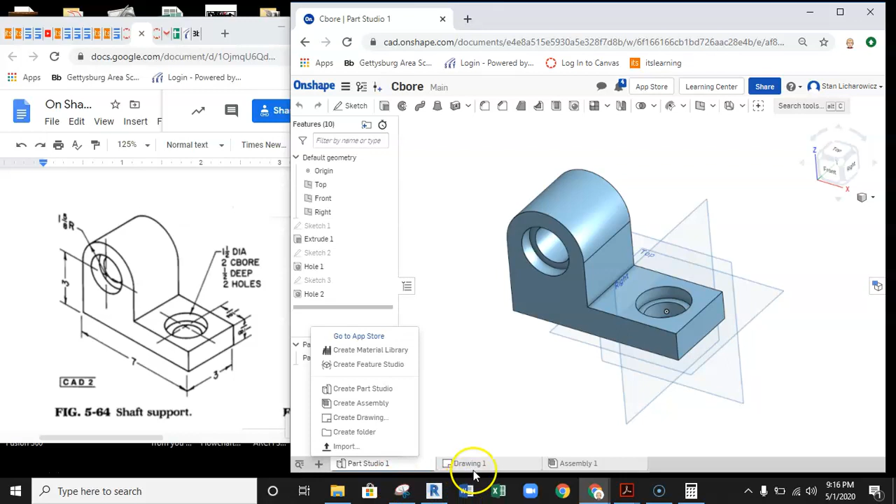Okay, now we're ready to go ahead and lay out this part and set up a multi-view drawing of a part with a counterbore. So to do so, I would go ahead and hit this plus, go ahead and hit create drawing. When I do that, I'm going to get this drawing file that pops up. Now generally, the drawing insert file will pop up. If not, click on this little button up here. It says insert view. Go ahead and hit the insert button. And when the select part or assembly file pops up, hit the part that you want to select here.

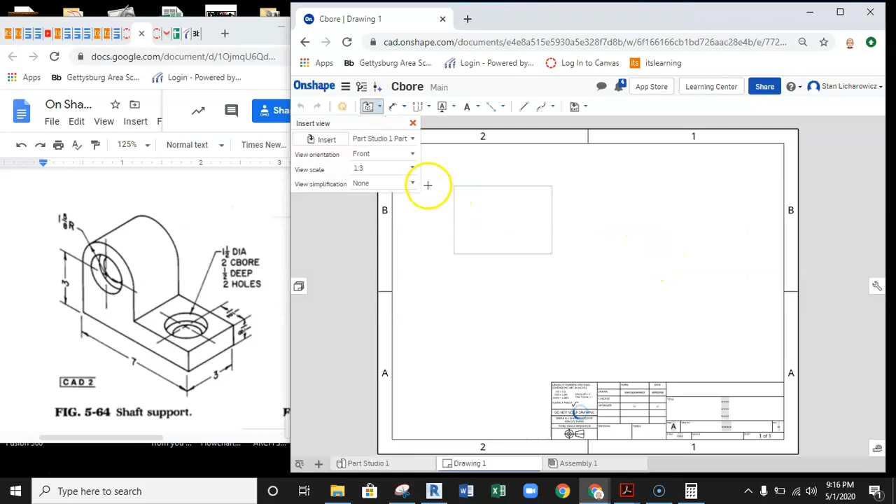Once that opens up, we can go ahead and select the scale that we want. Now it's giving me a 1:3. I don't want a 1:3. I'm going to want to go bigger than that, 1:2. Yeah, 1:2 probably will work. So we'll go ahead and drop this as our front view. And I'll go up to the top view. We'll go ahead and drop that right away. And then it's already set up on projected. So I'm going to go ahead and click the front and then project over to my right side. So hit escape to finish that command.

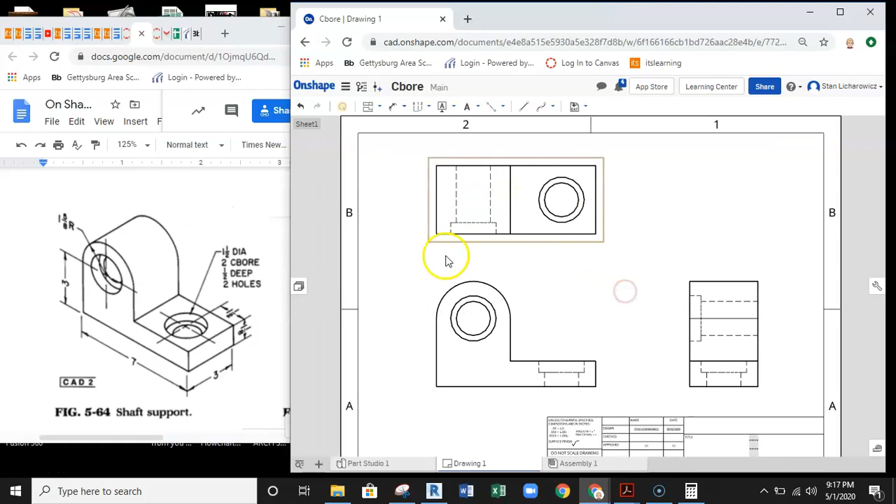Now I'm ready to go ahead and I want some hidden lines. So I'm going to left click and then right click, and select that show hidden lines option at the top of the right click menu. Now the next thing we're going to need to do is put in all of our center marks and center lines. So first we need to locate where all those center marks and center lines are hiding in this particular piece of software. Oh, there they are. They popped up. I guess I had to pull my screen a little bit.

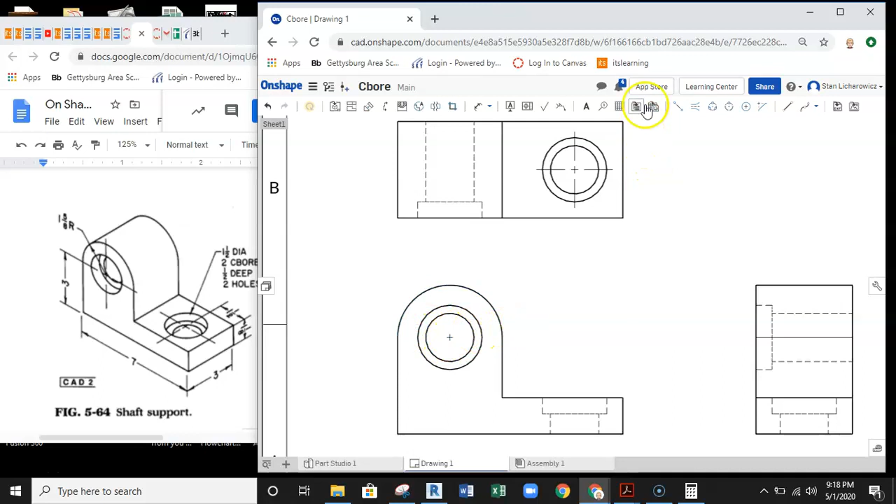So there's my center mark tool, and I'd say I'm a little disappointed in the center mark tool for OnShape. It does not really give me a nice center mark, so what you have to do is grab this 2-point circle or 2-point center line to make a full center mark and go from one side to the other. Unfortunately, I think we're probably spoiled a little bit with center marks. It could be adjusted right away from the onset. So anyway, really zoom in pretty darn close here to make sure I'm getting the right thing, because this is all concentric. I want to make sure this works. There we go. So we have a center mark, center line.

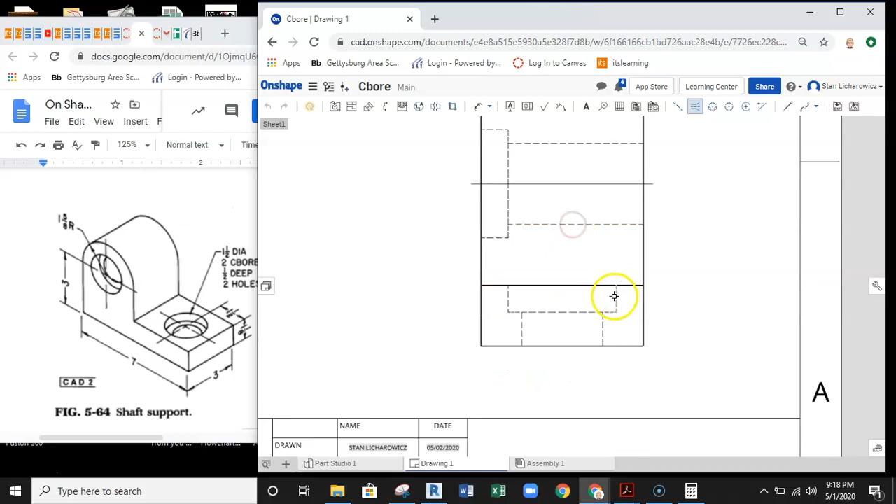Now we're going to go ahead and set up those bisectors, clicking on each one of those lines here, dropping those into position. We'll go ahead and drop this into position here and set those bisectors up, working our way around the drawing. Haven't found any way to do automated center lines yet. There may be, but I just have not found that yet. All right, so we got our center marks and center lines. Now we're ready to go ahead and start the dimensioning process.

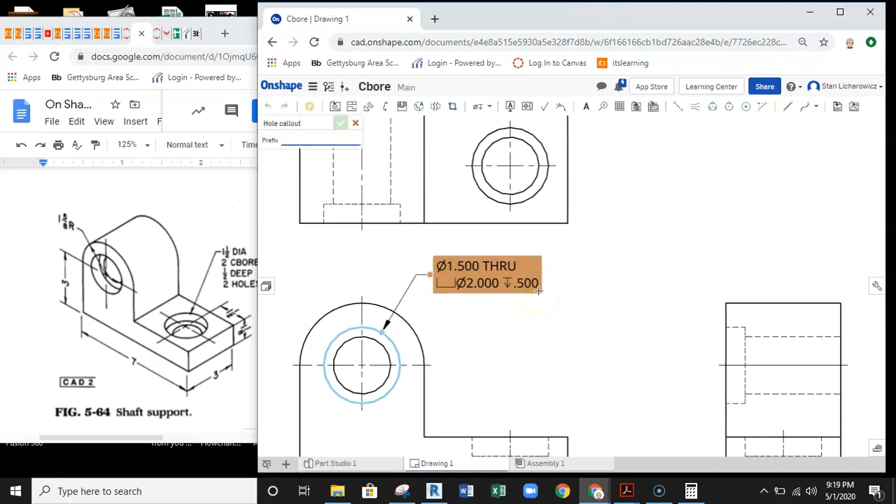So dimensioning, you have a nice long pull down here. And since we have this counterbore, I'm going to go right down here to the hole callout, because I know that I used the hole tool to create this counterbore. I'm going to select it and pull out. And there's that counterbore note that I was hoping for. So it shows up, and there it is. So with that, I'm not sure what kind of editing procedure would get us a prefix here. So I could put in that I have 2 times that counterbore, giving me 2 features in the part. So that works. So now you just go through and start dimensioning this as if it was a standard part.

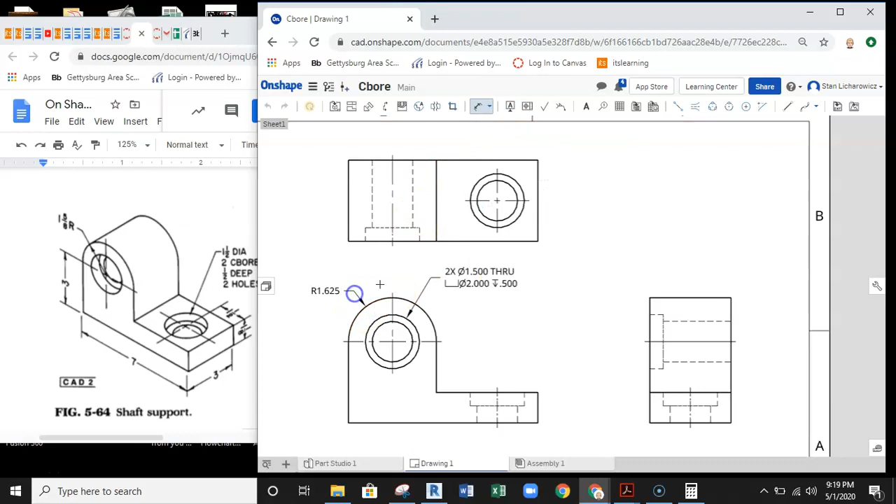So grab my dimension tool, go ahead and set up my radius. Yep, pulls radius. Now we got to set up our depth here. And we'll get some height information on the part here. We'll get some thickness as well. We already have that, so I'm not going to duplicate. Let's go ahead and get some positioning information. Oh, not there. Let's do this again. We'll go from the center mark here to the side of the part. Pull this down, drop it there.

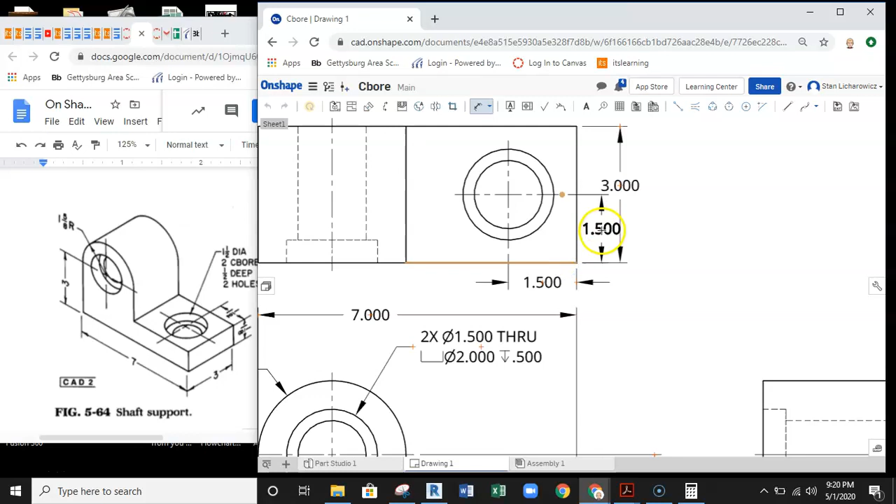And let's see. How about like an overall? We don't have any overall information here yet. So we'll come up here and drop this to the top. Now, obviously, you're going to have to pull some stuff around here because we can't have these dimensions running into each other like this. So we'll pull this up a little bit higher and set that in position. So we got the overall, we have the arc, we got our counterbore times 2, position for the counterbore. Now, I don't have a center line on this all the way through the part, and it's not symmetrical, so I really can't do that. So we'll pull this out to the side and position that. There we go, something like that.

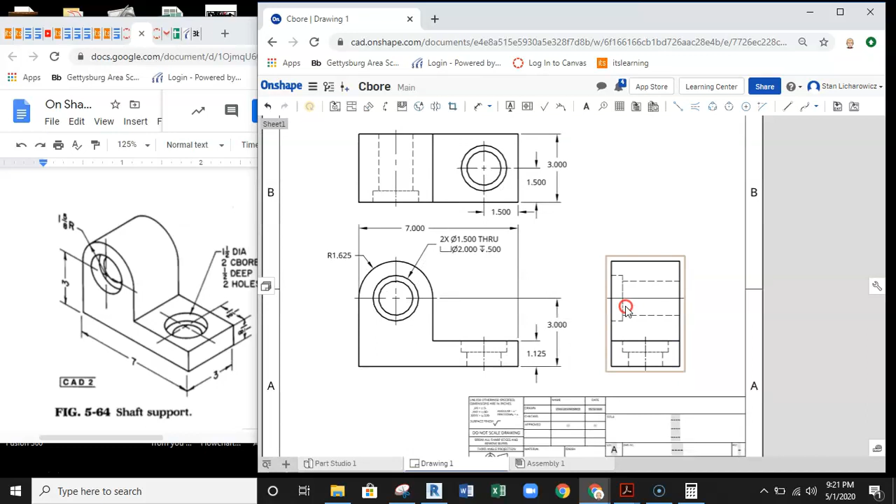So we know where the hole is, we know the depth of the part. We know this, we know the height, we know the overall length. I know that information. Looks fairly well dimensioned. Don't need to over clutter things. Really could probably get rid of this right side view, because I'm able to give all this information, I believe, in the 2 views. All right, so hopefully this helps you work through how to dimension a counterbore.